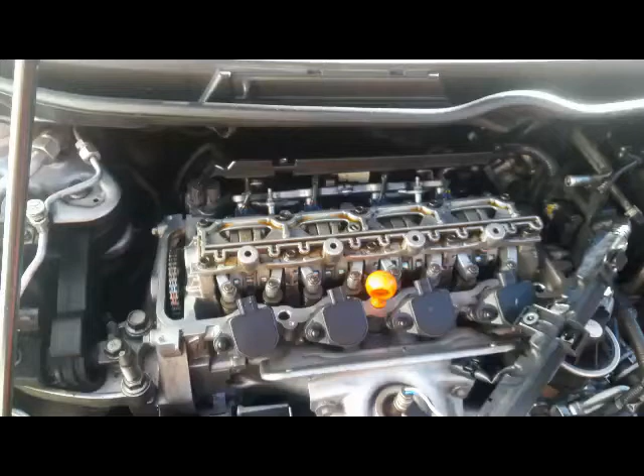Okay, for this section here, I'm just going to continue on with checking the valve clearance or valve lash. Okay,

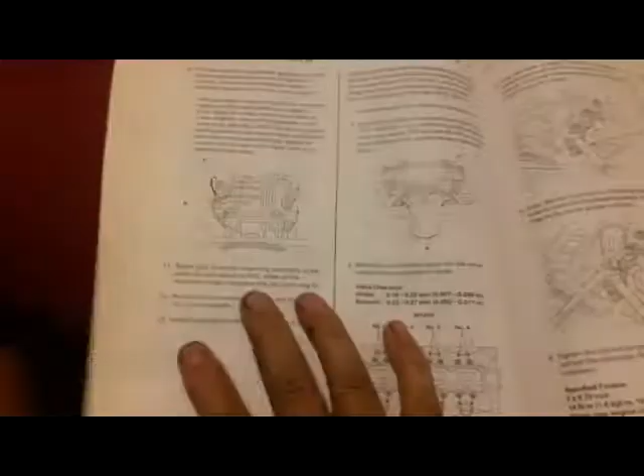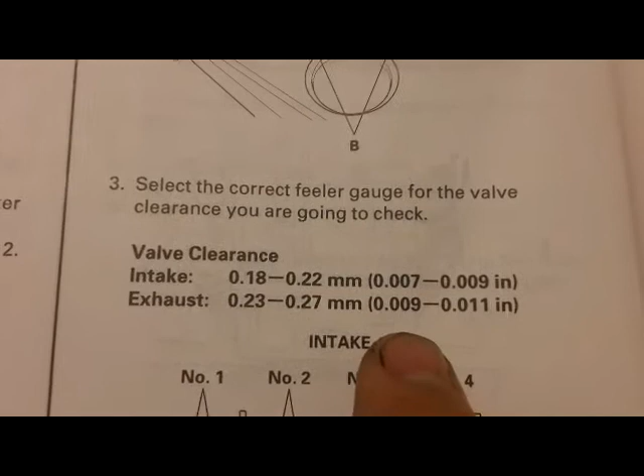Okay, this is for the valve clearance. Looking at the manual there, 2006-2010 service manual for Civic, page 68. You want to do this when the temperature is below 100 degrees. And here's the valve clearance. I usually see this under the hood, but I didn't see it on mine, so go by that.

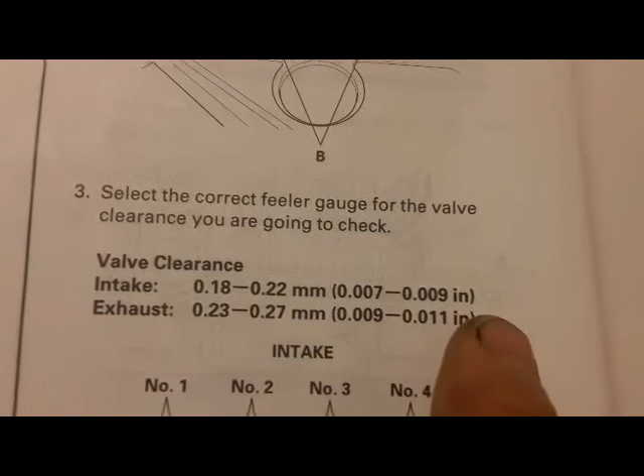The intake is 0.007 to 0.009. Exhaust is 0.009 to 0.011 inch. And here you've got two intake valves and two exhaust valves. All the exhaust valves are located toward the front of the car where the oxygen sensor is. All the intake valves are located toward the inside of the car.

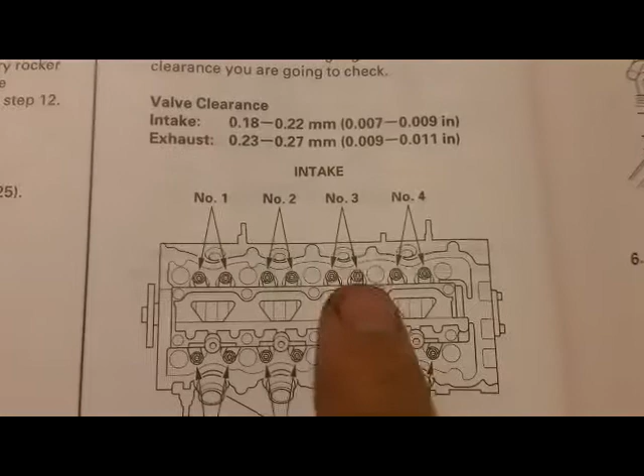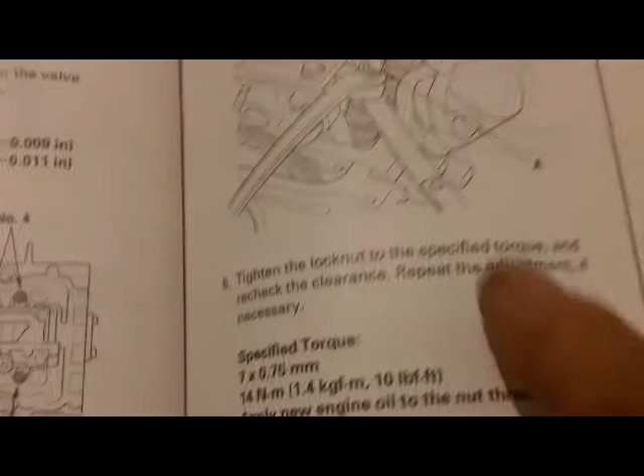So remember that valve clearance right there. After you do your valve adjustment, the torque for the lock nuts is 10 foot-pounds. For the K20Z3 engine, you're going to find the valve clearance on page 360 in the cylinder head section.

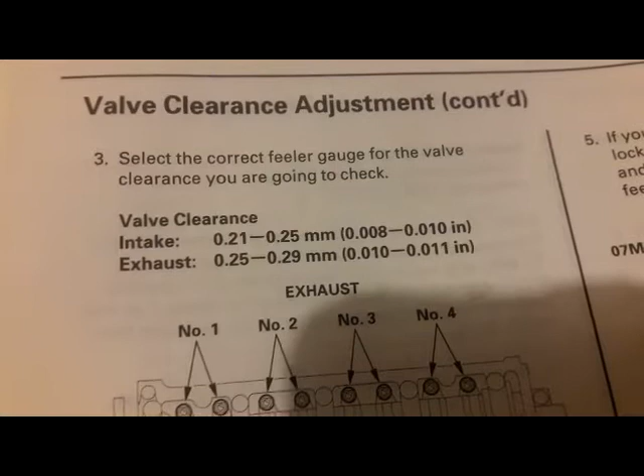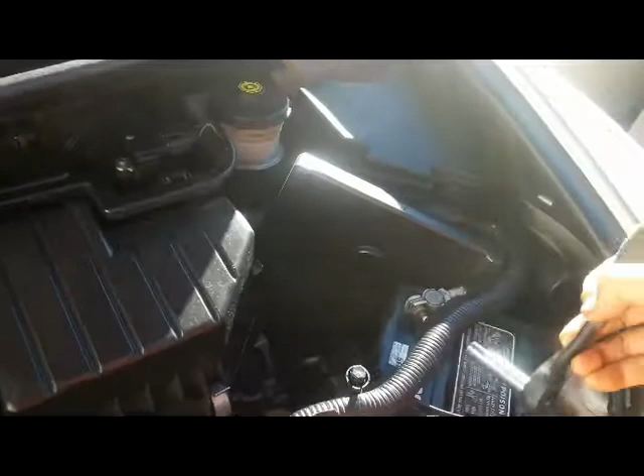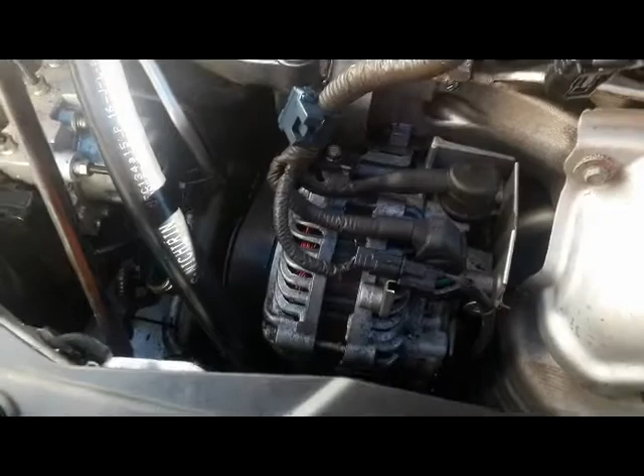First thing I'm going to do is disconnect the battery. Using a 10 millimeter socket, I'm just going to disconnect the negative battery and get that out of the way. After that, I'm going to disconnect the alternator connector to get this thing out of the way.

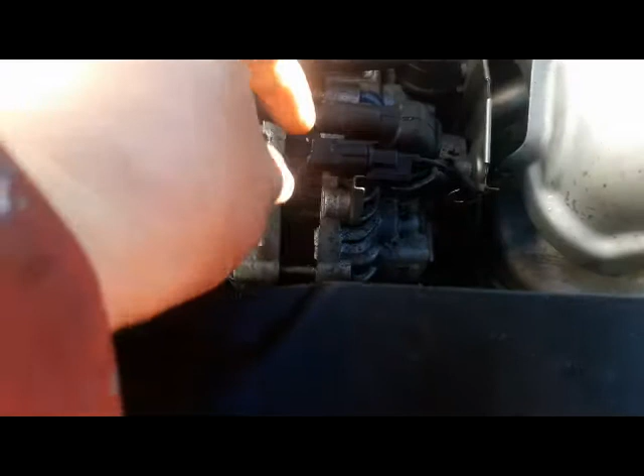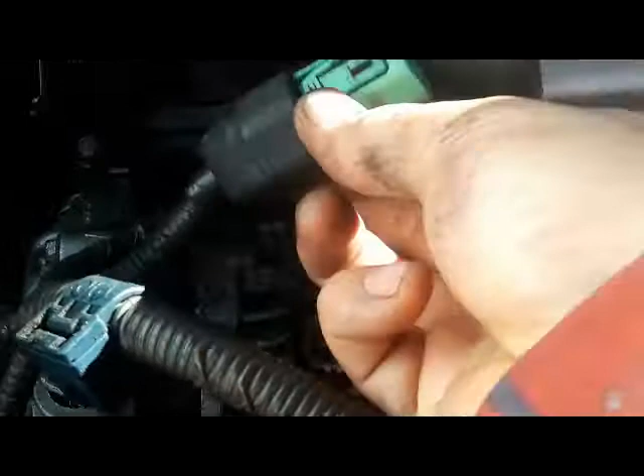The first one is this one right here, a clip. All you do is push it and wiggle it, and it should come right out. Next is this rubber cover; take it out. There should be a green plug with a button on top. Push the button in toward the left side of the car, then wiggle it and pull it straight out.

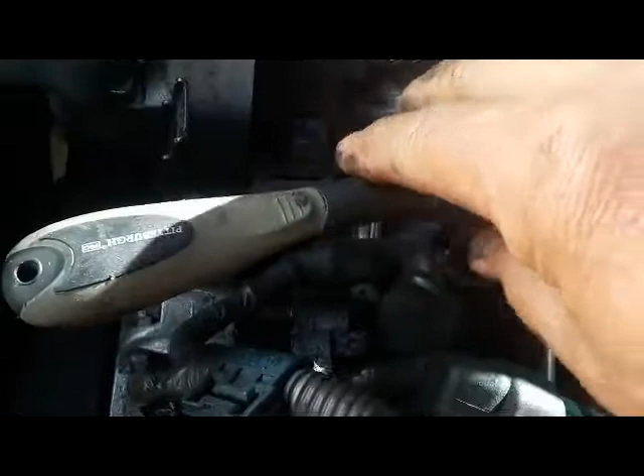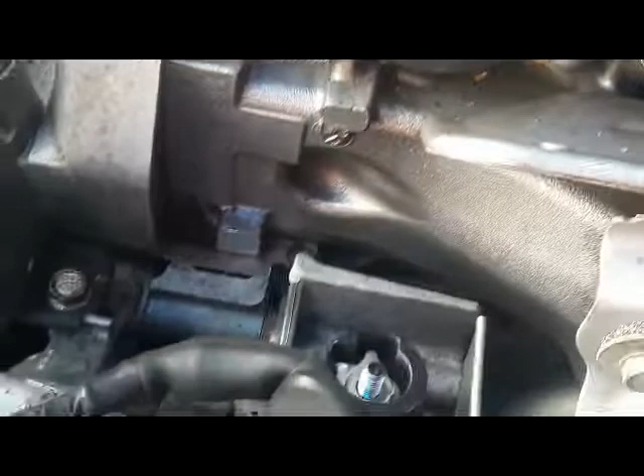This one right here, under this round rubber bushing, there's a nut. Using a 10 millimeter, since the battery is already disconnected, it's safe to do this. Break the nut loose and get this out of the way. Here's the nut. Is there a washer on top? No, that round thing looks like a washer, but it's not.

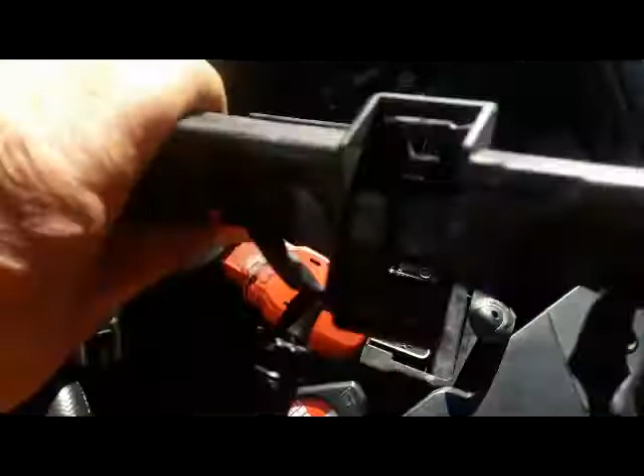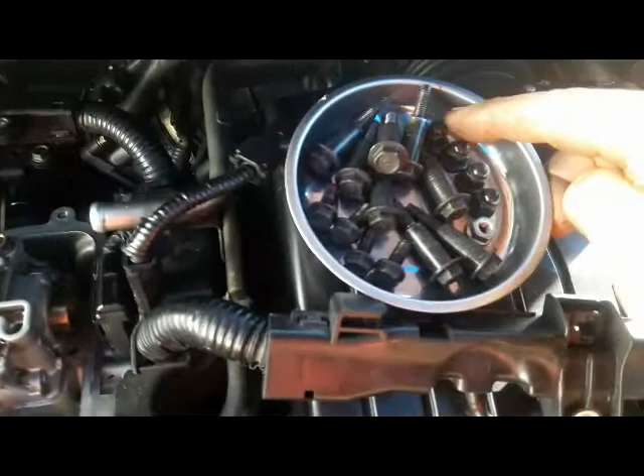After you disconnect this, just flip it over to this side so it's out of the way. Next, I'm going to remove the coils. With the same 10 millimeter ratchet, I'm going to loosen and remove all 4 nuts. That's what the nut looks like, and there's the alternator nut.

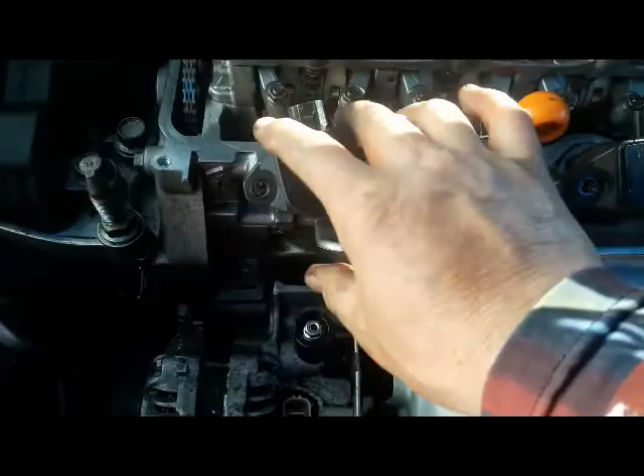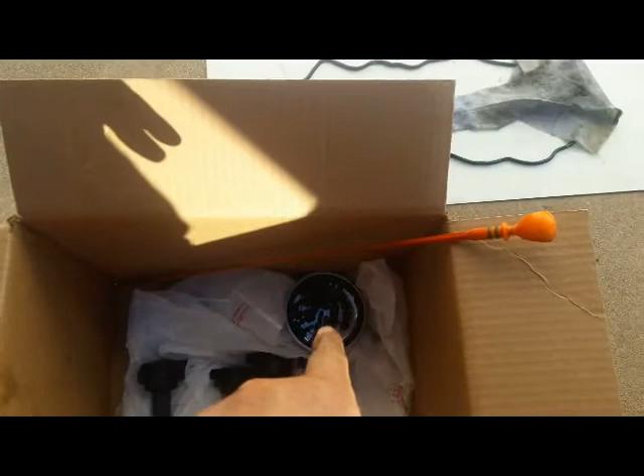This one I'm going to put right back here so I won't lose it. Next, remove the coils: wiggle it and lift it up, then take the coil out all the way. Put it all in the box: coils 1, 2, 3, 4 in that order, the bolts and nuts, and of course the dipstick, all in a nice box.

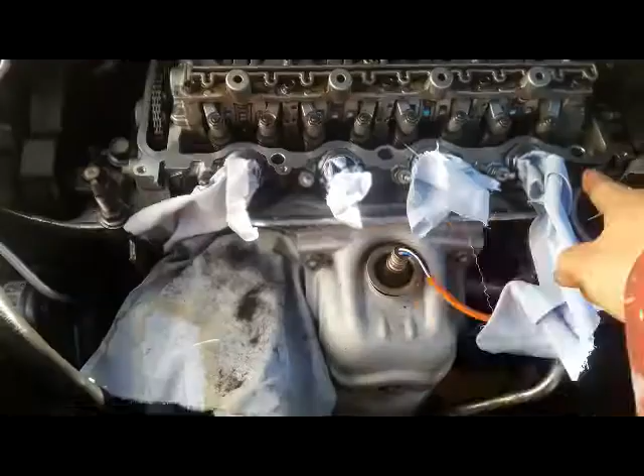Next, I'm going to take a clean rag and put it in each of those spark plug sockets to prevent anything from accidentally falling in there. Cover this one too. Next, I'm going to prepare to turn the engine over, align the mark, and start checking the valves.

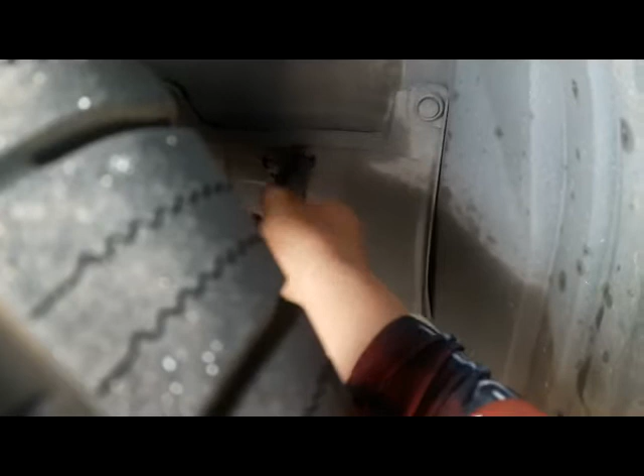Here's my setup: a 1/2 inch 19 millimeter deep socket, a universal joint, a long extension, and a ratchet. What I do with this 19 millimeter is stick it in that pre-cut hole right there, and you should feel the crankshaft bolt.

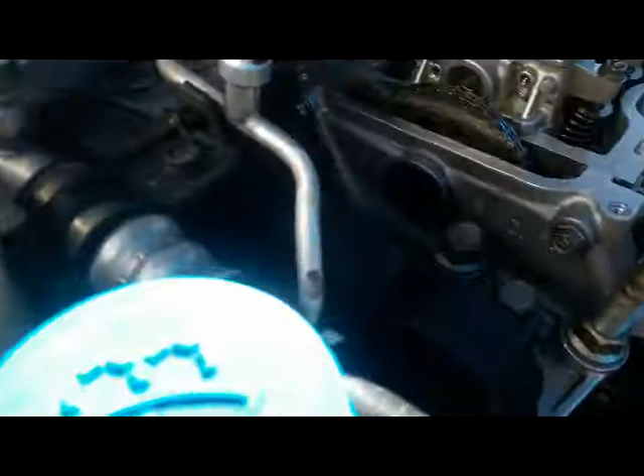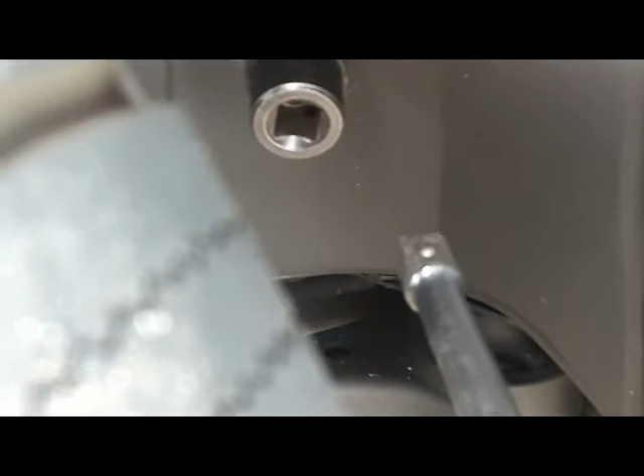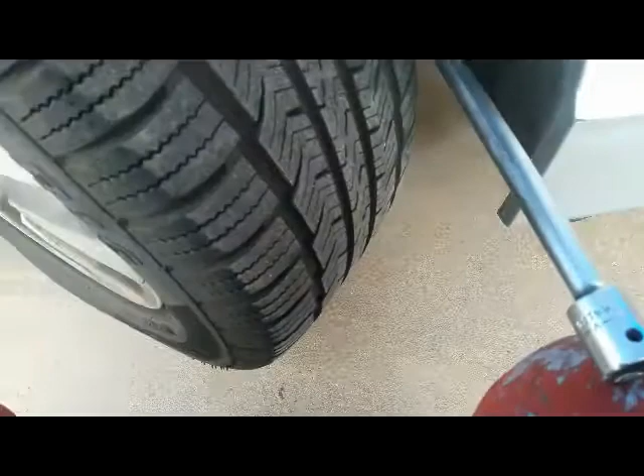I don't know if you can see it clearly on my camera, but right there it fits onto the crankshaft bolt. After you fit it in, put in the 1/2 inch extension like so, and then your 1/2 inch ratchet. Then you want to turn it while watching up here.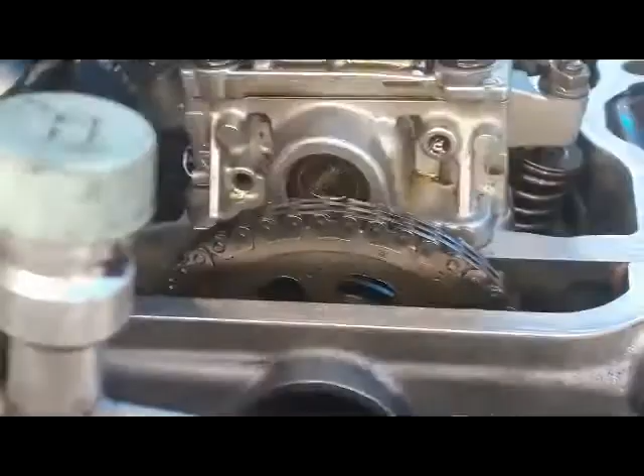Okay, you see that word that says up right there. The word up, that's going to be like 12 o'clock, and then you're going to see the alignment mark. That is this mark right there. And for this, up is number 1 cylinder, so there should be another alignment mark on this side. Okay, so I'm going to turn it to that mark, parallel with this edge right here.

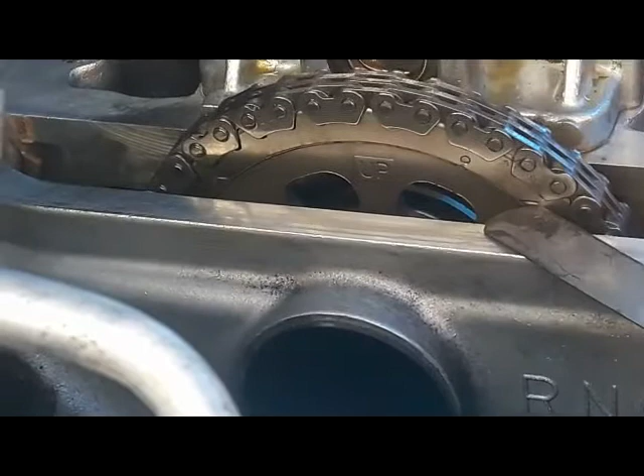Okay, right there. All right, and this right here where it says the word up, that means number 1 cylinder. Okay, so number 1 cylinder is this one right here. So here you've got 2 exhaust valves and 2 intake. Okay, so right now, if you wiggle it, you should feel this wiggle. The other valve should be tight. See, that's because the cam lobe is at top dead center. Both valves are closed, and that's why there's some play here.

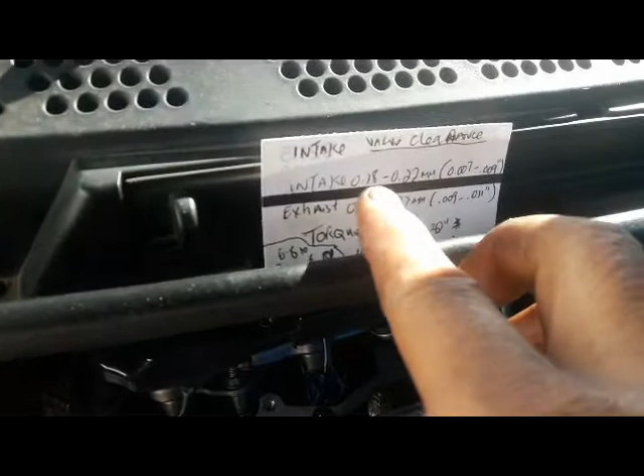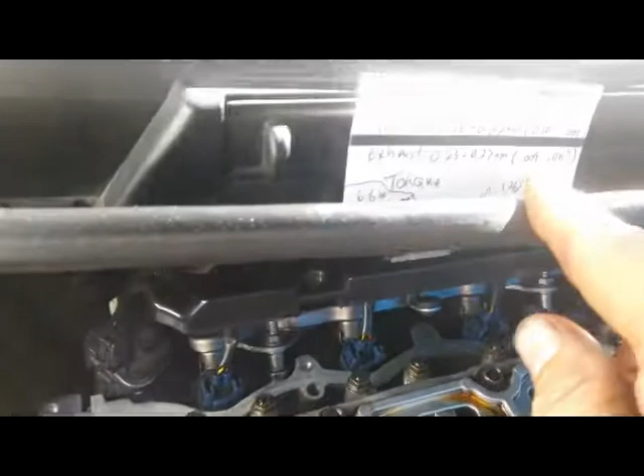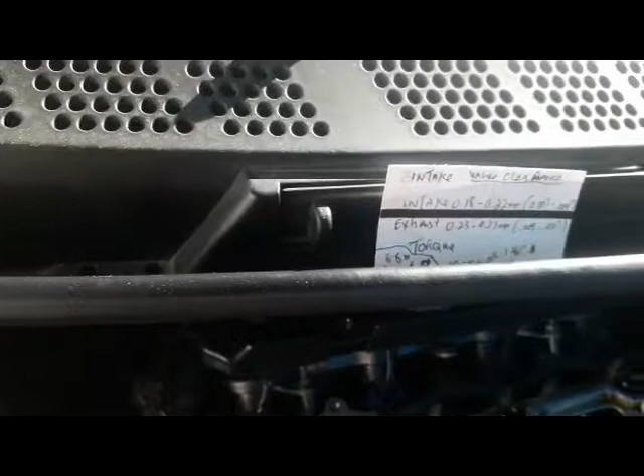Okay, so now what you want to do is take out your instructions. I put the instructions right here. Intake is 0.007 to 0.009. And then the exhaust, which is the one out here. Here's the 2 intake right there. Here's the exhaust. For the exhaust it's 0.009 to 0.011, and this is millimeters, 0.23 to 0.27 right there. So I'm using that figure to check these valves.

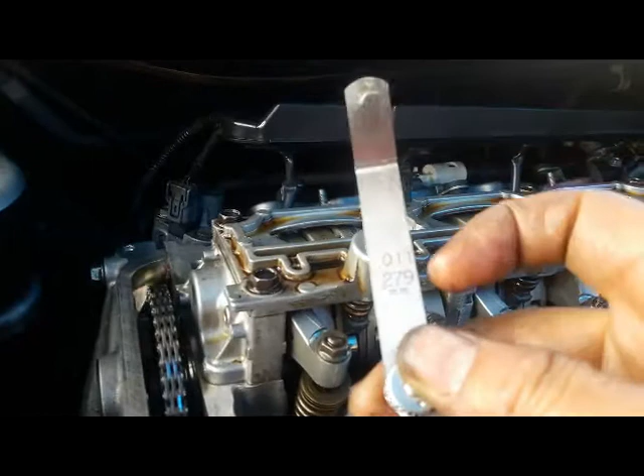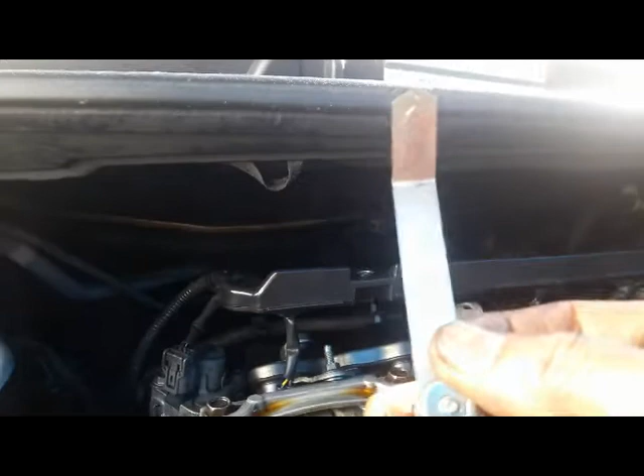Okay, so the way I adjust mine, I use the feeler gauge with a curve here. 0.011, that's inches, and 0.279 is the millimeter gauge. So you're looking at the instructions on the exhaust right there. That's what I use. I use the max number, and if I can slide this in, then that's good. So I slide it in. As you can see, it fits. A little tight, but it fits. And then same way with this valve here. See, it fits in.

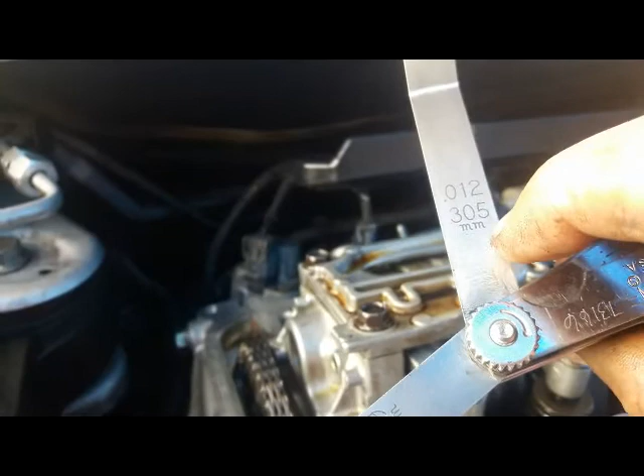Now a lot of people ask me, how tight is tight? Well, if you use the next number, here, let me adjust my gauge. If you use the next number, which is 0.012, that's right there, 0.305 millimeter. So if you try the next number, and you can't fit the next number, which in this case you can't, then you know you've got it perfect.

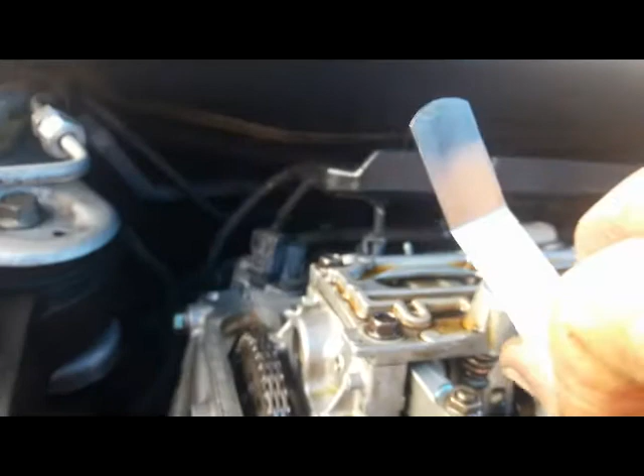I'm using the inches scale up here. If I stick in 0.012, where the original clearance called for 0.011 and it fits a little tight, if I'm able to fit this in, then that's too loose. So that's my rule of thumb right there. People say, how tight is the drag? The way you do it is go to the next gauge, and if you can stick the next gauge in, that means it's too loose. I hope that makes sense. So this one is a little tight, but it's in tolerance, at max 0.011, so I'm going to leave it like that.

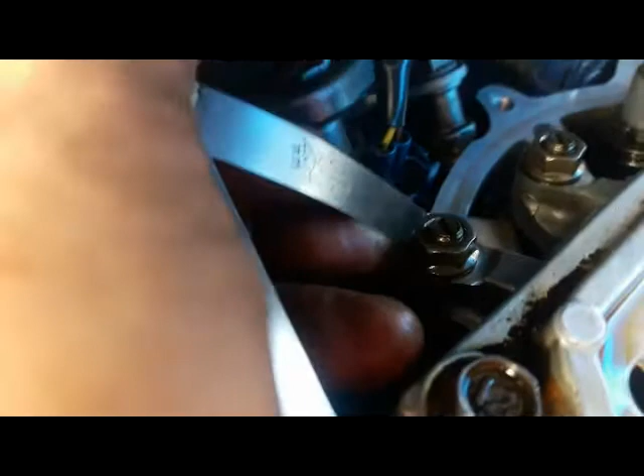Next one, I'm going to go to the intake, so I have to adjust my gauge. I'm using the inches side, so it's 0.007 to 0.009. This is the intake side. I'm using 0.009. As you can see, number 9, I was able to slide it in. And on number 10, I'm not able to slide that in. So this valve is good. I'm going to do the same thing to the one next to it on number 1. I was able to slide in 9, and I try 10 and get nowhere. So number 1 cylinder is good.

Alright, so I rotate the crankshaft clockwise. You see number 3 on top, and the alignment mark is right there. I take my feeler gauge, or you can use a straight edge. Make sure you're consistent with this. So I align with the alignment mark right there. On this side, number 3 doesn't have any. There's only an alignment mark on both sides for number 1. So number 3 is these two right here. This is the exhaust.

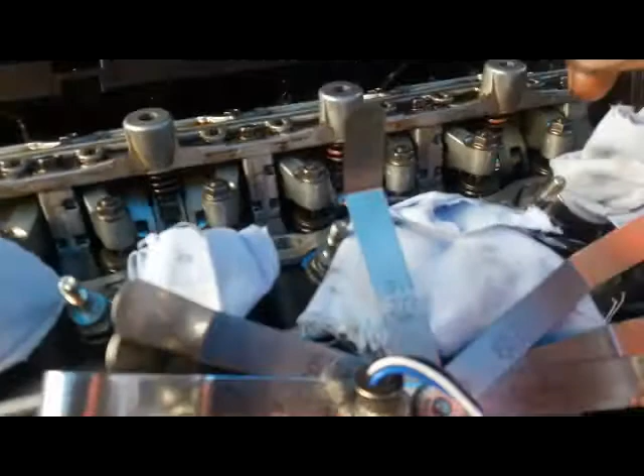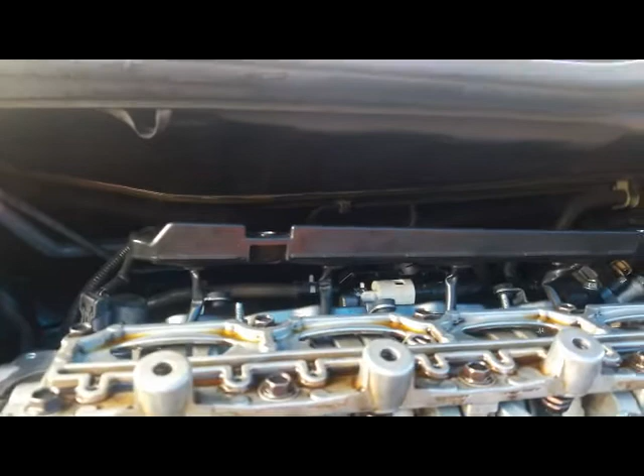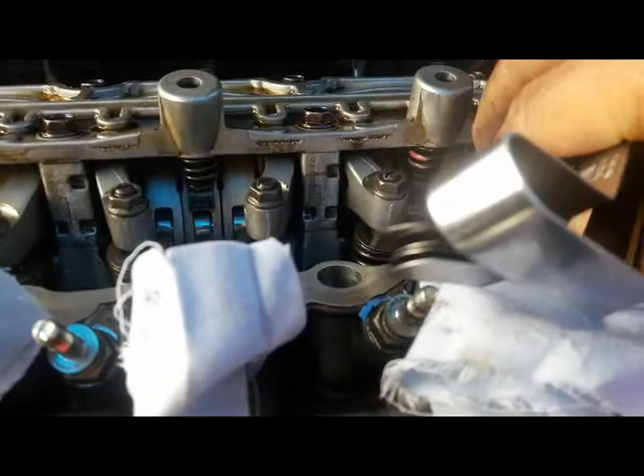Always leave your instructions where you can see them and refer to them, because a lot of times when you're doing this, you're going to get confused between the intake and exhaust. So always keep the instructions and look at them as a reminder. Here I've got 0.011, using the inches. I'm going to slide this in like so, and as you can see, I'm able to slide that in, and pull it out. Check the next one.

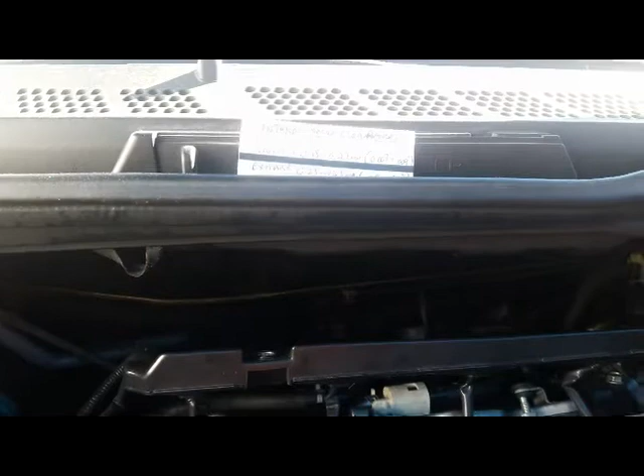Okay, I was able to slide it in again, and then I go to the next one. So the exhaust is down here. 0.011 is the max. So now I'm going to use 0.012. Now I'm using 0.012.

So I'm going to try to slide this in. No go. Same way with this. No go. So I'm going to leave the exhaust like that. That's good, it's at max, it's 0.011. So now I'm checking the two intakes, and I'm going to change it to 0.009.

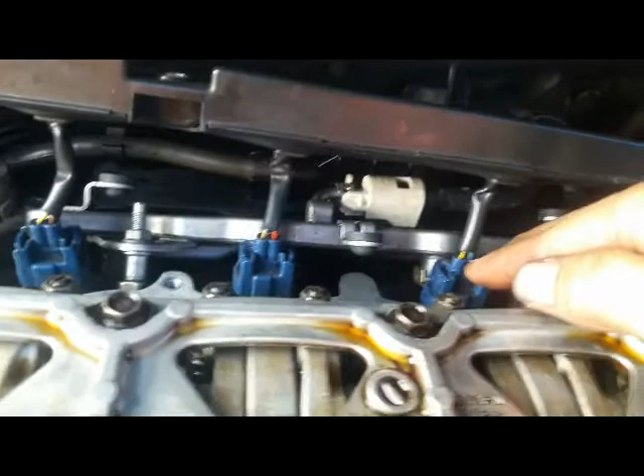Okay, so for this one in here, I think it's easier if I take these few injector connectors off. So with two fingers here, you pinch it and you wiggle it, pull them out. Same way with this, pinch it, wiggle it, pull it out. Once you pull all 4 out, slide it back like this.

So I guess I can take this one off too to give me wiggle room here, and you just pull them straight back like that. That way you get the room back here. All right, so number 3. Always count this again: 1, 2, and 3. These 2 right here. That way you don't get confused.

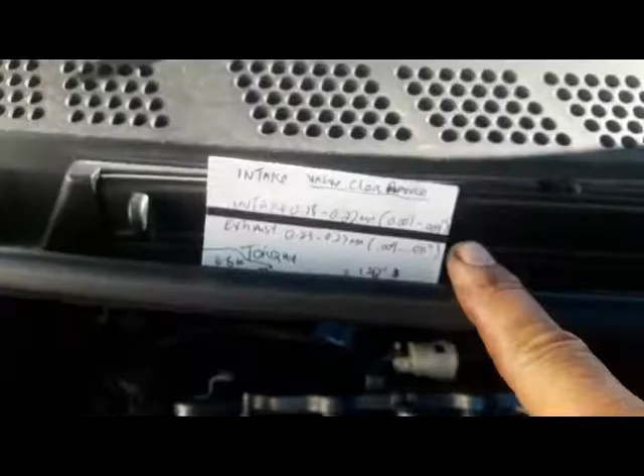So I'm using 0.009, the max. Refer to this intake, max is 0.009. See, it slides in like that. So this one is good. Let's see this one. Okay, I was able to slide this in, 0.009. That's the intake right there.

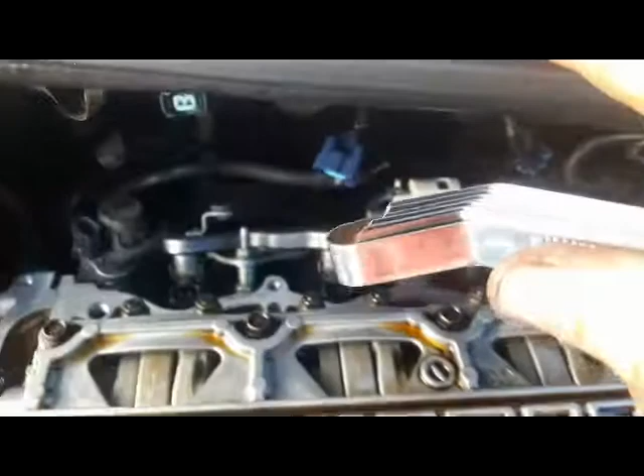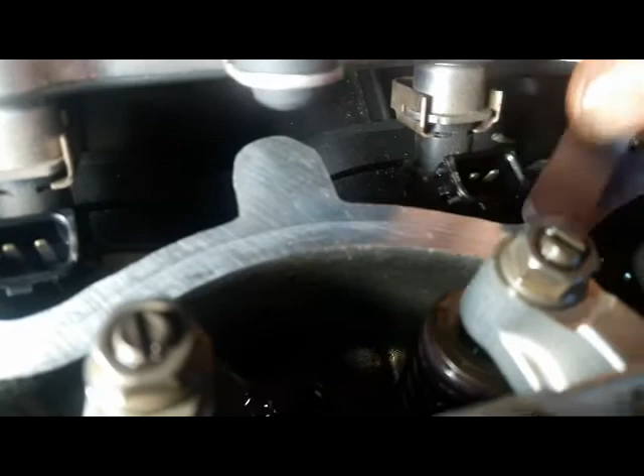So I'm going to change this to 0.010. See what happens. There it is, 0.010. I'm going to try to slide this in. Okay, so there's a no-go right there. And then on this side, there's another no-go right there.

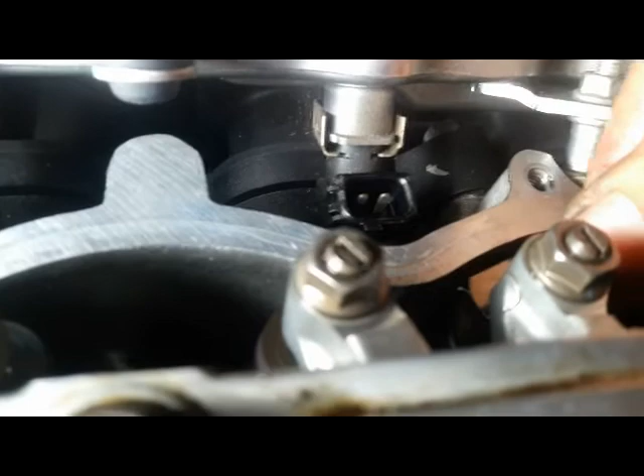So this number 3 is good to go, both of them according to that clearance. So next thing, I'm going to turn to number 4, which is the last 2 here, coming up next. As you see, I'm turning from number 3 clockwise, so number 4 should be coming up. You see that alignment mark right there, and number 4 showing right there.

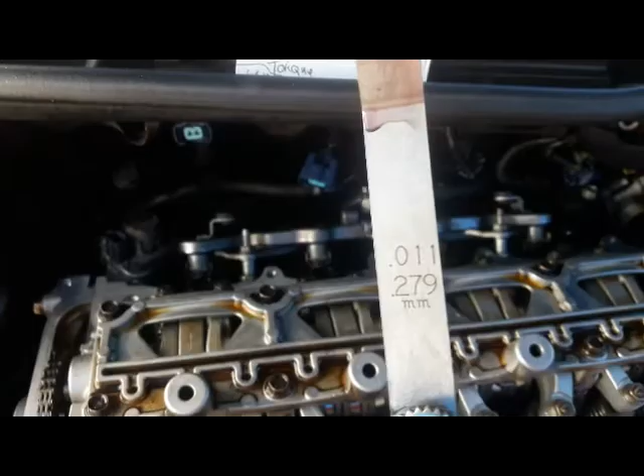So when you do this, do it really slow, because you put the feeler gauge in and that tells you how much further you have to go to align that mark. Make sure your feeler gauge is flat. Slide it in right there, perfect. So number 4 is up. Again, the exhaust is 0.011, that's what I'm using right here. That's 0.279 on a millimeter scale. So 0.011 is the last 2 right here.

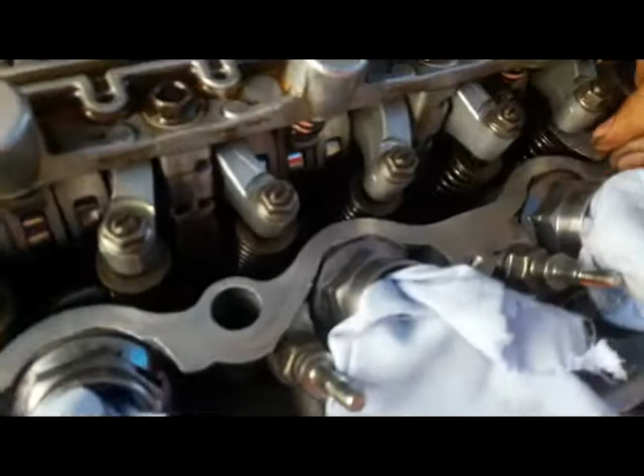So I'm gonna fit this in. This one here looks like it fits in. I'm gonna pull it out. Try this one. This one looks like it slides in just fine. Take it out. All right, so next one I'm going to try 0.012.

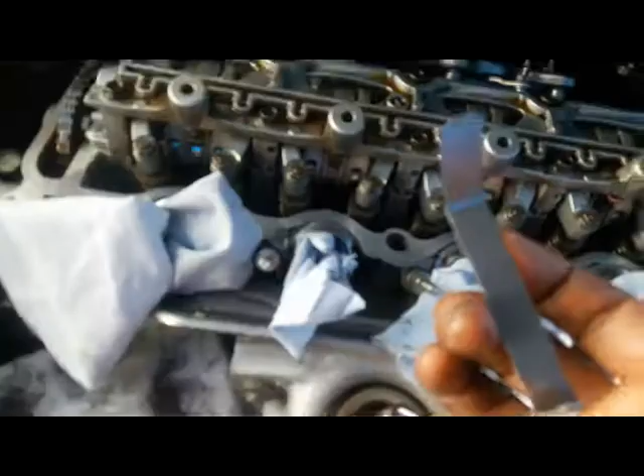Okay, 0.012. I'm going to try to fit this in there. No go. So that one is good. I can't fit in 0.012. So number 4 exhaust valve is good. I'm gonna move to the next one, intake. Now I'm gonna change it to 0.009. This is 0.009 on number 4 intake.

I was able to slide this one in on that one, and on this one, it looks like both of them are good. It's hard for me to set my angle on this one, it's hard to see. So, right there, I was able to slide it in on 0.009. So now I'm going to change it to 0.010 to see if it's going to fit.

So 0.010 right here, I tried to fit it in, but it won't go all the way in. Same way with this one. Doesn't fit in on 0.010, so that's good. So I leave number 4 alone. It's in tolerance, the intake valve, according to that number.

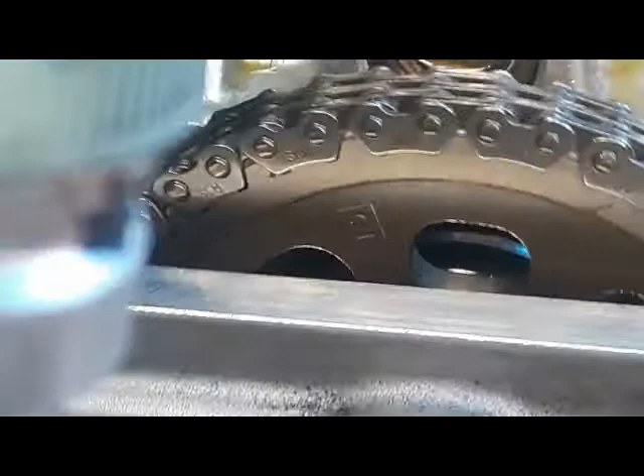All right, so next one in the turn is number 2. These 2 right here should be coming up next. So I'm gonna move away from number 4, turn this clockwise, and you should see number 2 coming up. So that timing mark is right on 12 o'clock right there, and you should see number 2 right there. Now I'm going to slow down and feel that timing mark.

Okay, timing mark. Where the heck's my finger? Okay, right there, timing mark is perfectly aligned. So number 2 right there, and number 2 is these 2 right here. As you can see, if you can wiggle it, you should feel some slack.

So this is the last one. I'm using 0.011 for the exhaust valve. So this is number 2. See, this one slides in. And then you go with this one. This one also slides in.

All right, so next I'm going to switch to number 12 to see if it's coming in. Okay, number 12. So if you have a tight fit on number 11, you're not going to be able to slide in number 12. Okay, so right there, no go. I tried to push it in, but can't. So same way with this. Okay, no go.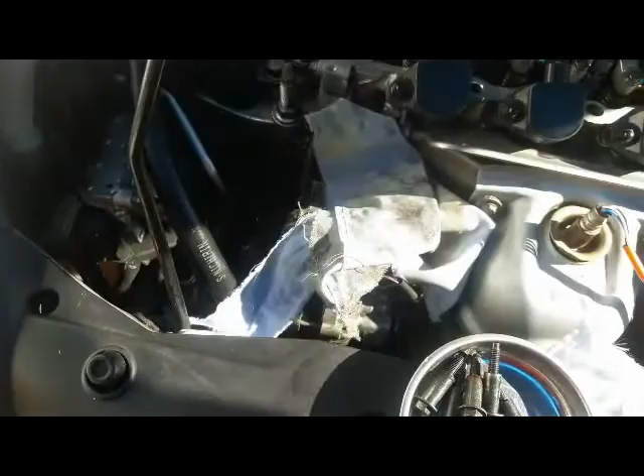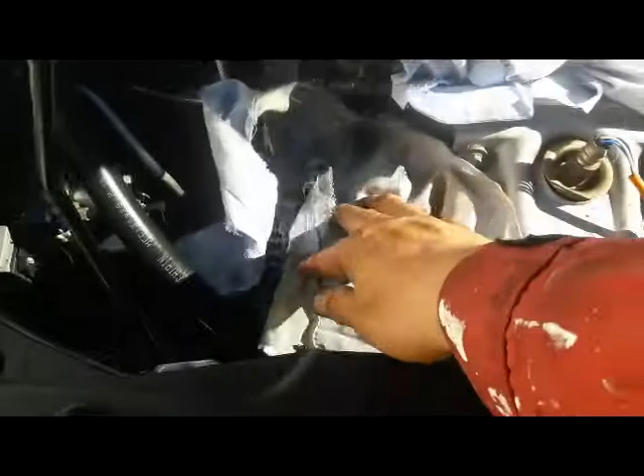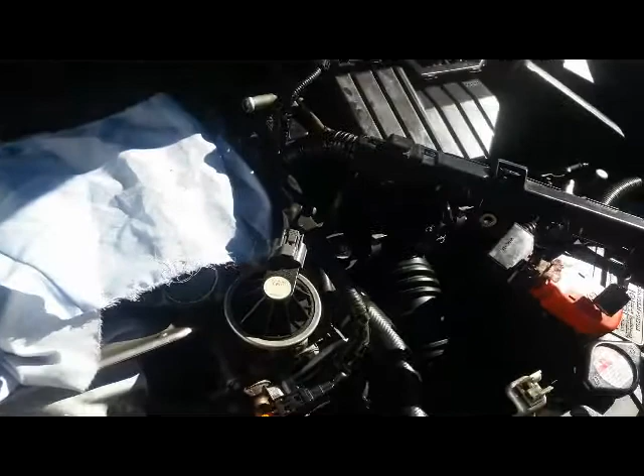Alright, after that, I'm going to hook that cable back on to the alternator. I'm going to put those wires back onto the alternator. I just cover the valve cover up, that way when I put this on, nothing will fall inside there. So I'm going to take this rag out, take the nut out, make sure it's clean. Now I'm ready to put that electrical wire back. Slide this over like so.

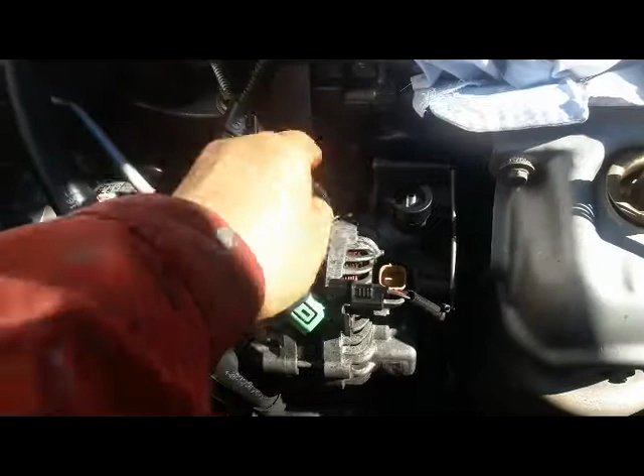What I'm going to do is put this connection on. Like that. Then this green one goes in, see that arrow pointed toward the exhaust pipe. Should snap in like so. Make sure this thing fits in. Then this one like that, snap in. Now I'm gonna put that nut back on. Get the torque wrench and torque this down to 6 foot-pounds. 6 foot-pounds, not that much. Now hook this rubber thing back on.

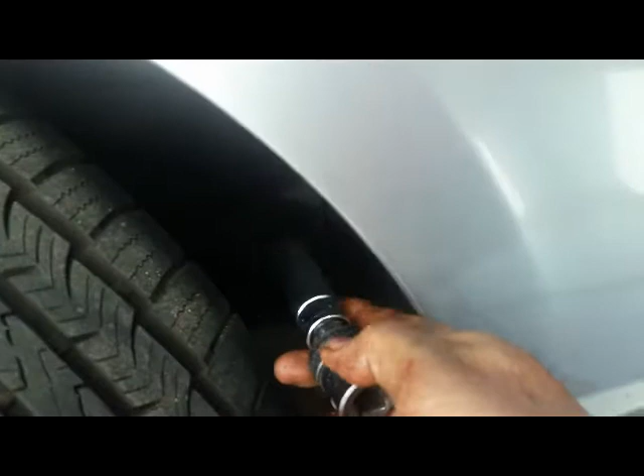So after you're done, don't forget you've got a 19mm sitting on the crankshaft there, so make sure you take it out. That's pretty much it for valve clearance check and adjustment if you need it. In my case, I don't need to adjust anything. What I'm going to do next, because I have a problem with the valve cover gasket, I'm going to put the old valve cover back on and wait until the new one comes in. And I'm going to leave the battery unplugged to the end.

And I just tuck this underneath here like that, so it holds it open and it's easy to install the valve cover. All right, that's it for this section of video.